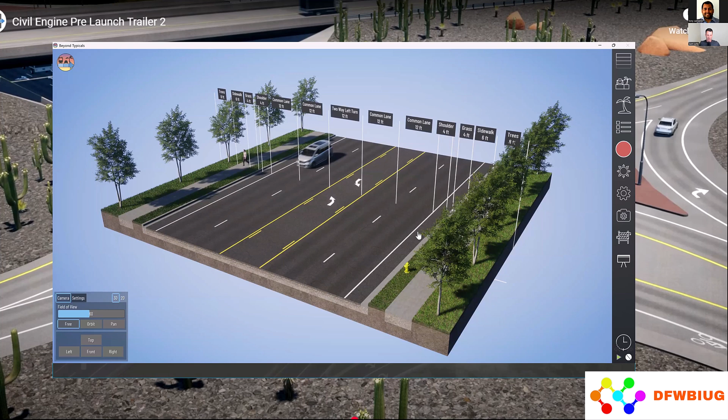So in 2022, about 3 years ago, we launched Beyond Typicals, a 3D typical section creator, which I'll demo. That's been going very well - it's become kind of an industry standard for typical section generation, and it's also been pushed beyond what we thought it could originally be used for. Then last year we started work on Civil Engine, which is a more robust visualization engine for transportation, and I'll get into that more in depth.

So I do want to show Beyond Typicals briefly. This is used by more than 150 organizations, and maybe some of you on this call are familiar with it. If you are interested, I encourage you to reach out to our Contact Us page - Brian Stropes is on this call, he's our point of contact on Beyond Typicals, so you'll probably be working with him. Essentially, this is an interactive drag and drop 3D typical section creator.

I'm going to bounce through a couple of example projects we have preloaded in the software. You can see here this is adjacent in an urban scenario to these buildings, and we have phasing, so we can go existing, trenching, lane closure, final - quick communication, and it's pretty easy to put these things together.

Our goal with all of our software at BeyondCAD is to democratize visualization so that engineers can do the visualization themselves - empowering those designing the projects to also visualize and communicate them. We want these to be intuitive tools where you don't need a background in visualization, you don't need to know 3D modeling, you don't need to know Blender and Photoshop - you can just learn our software and make the visuals straight out of there.

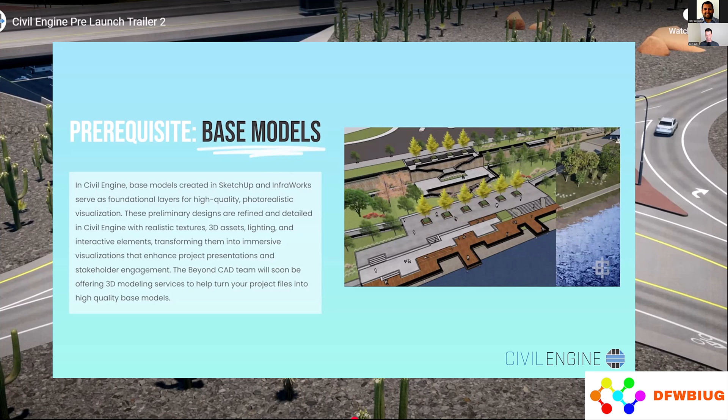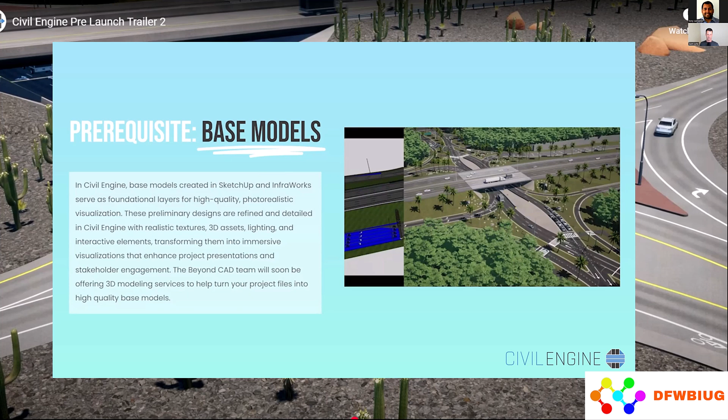Civil Engine supports FBX and OBJ imports. So theoretically, if you can export those file formats, you might be able to bring them into Civil Engine, but it's not always the best results. To be honest, this is the hardest part of all of it, getting your data from design into visualization. We're doing our best to make that a seamless transition.

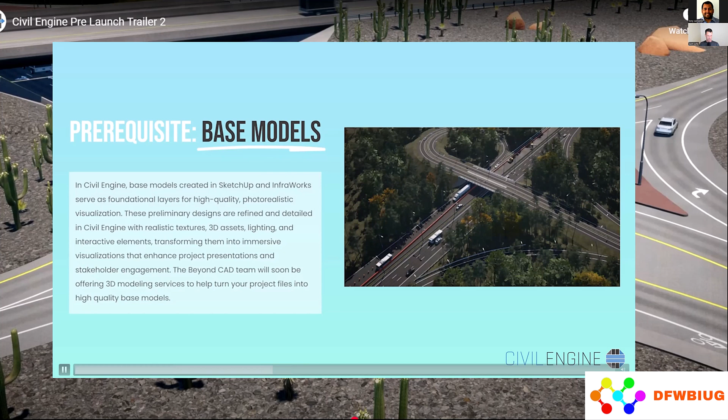That's why we're trying to focus on a few workflows and then expand out from there. I'll demo how this process works in just a minute.

Core to Civil Engine is the ability to put traffic in there. You do this by placing one traffic path at a time, and then you can link those traffic paths together using intersection controllers and merge-diverge linking. We're going to leave this in beta even after our public launch because we're still testing and refining. The traffic placement and intersection controllers are very robust, but the merge-diverge linking is still a work in progress.

One of the cool things about our advanced traffic is that the traffic library can be completely customizable, and you can do that per lane. So imagine a scenario where maybe you have an HOV lane and you want to make sure you never have trucks show up in there - that's possible. Or maybe you have a bus lane and you want only buses to show up in there - that's possible. Or you can do that globally.

So maybe there's one specific car that you don't want to show up at all - you can have that control. Or maybe you want our low poly vehicles, which are just kind of white blocky shapes, to all show up for aesthetic or performance reasons - you can do that as well. So all of that stuff is possible within the traffic system within Civil Engine.

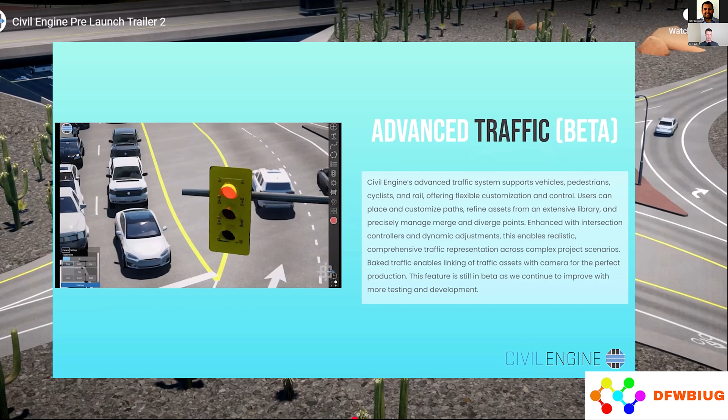The goal of our traffic system isn't to simulate or be a replacement of Vissim. It's just to give a good representation of traffic to communicate your project. That's our goal - we want to democratize the communication of projects in 3D for our customers. This is not design software, it's not intended to be design software, and it doesn't even integrate with Vissim. That's why we're really trying to make these things work really well within the product itself.

We have one of our core features, the path system. For those that have used Beyond Typicals, this actually functions very similarly - in Beyond Typicals, if you put an asset, you want to have that asset attached to a certain section, and then from there offset left to right, up or down, spacing, all those things attached to the path. This is the same thing, but you're placing the path using these points, and from there you can control the spacing, the offset, the scaling, and so on.

To be honest, when we did this, we were thinking, oh, this would be cool to put trees down a median or something like that. But the more we pushed this feature and functionality, the more we realized how many different use cases this could be used for - or traffic. And then I was like, oh wow, we could do this for barrier rail and guardrail to make it flexible in placement, which hasn't really been possible before. And then pavement markings is another scenario, both things like arrows, but also linear pavement markings as well.

Similar to the path system is the area system. You can imagine enclosing an area, and then it's the same paradigm where you're putting assets within that area and controlling the spacing. For both paths and areas, you can do multiple assets, up to 5 asset slots. So if you want 3 different types of trees in the same area, you can do that. With areas, you can do things like tree placement, 3D grass placement, and even area highlights, which is part of our visual graphics emphasis within Civil Engine.

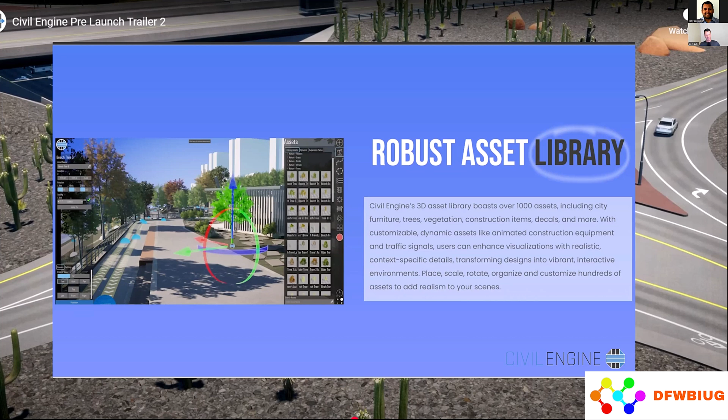We have around 1,000 assets, including static and dynamic assets. Static assets are things like trees or chairs or buildings. They're not really customizable, though trees may blow in the breeze. Then we have dynamic assets where you can customize them, like construction equipment where you can choose which animation shows up.

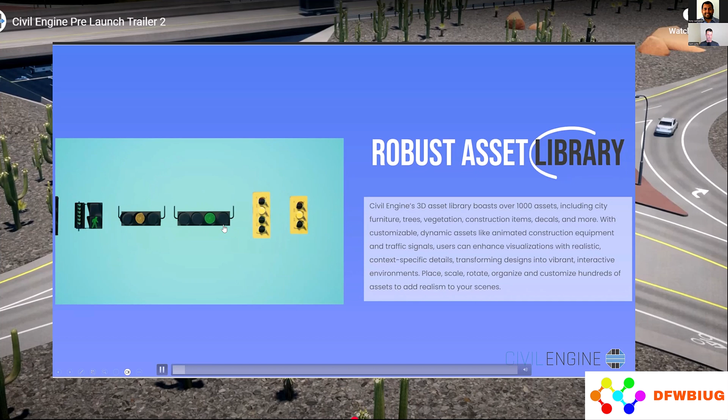Or maybe a construction sign where you can type in the message on that dynamic message sign, DMS, for placement. We also have some dynamic traffic signals, and those can be linked, some of them to our intersection controllers. That's kind of a beta feature we're pushing right now, and it will only improve from here on out.

We have a library of materials, our texturing system, and we've really tried to make these as realistic as possible. For these transportation and civil projects, we are not interested in architectural projects at all. We've had several people reach out and say, wow, this is really cool, I'm doing this building or architectural adjacent project. And I'm like, there are other tools for that - go use Lumion, go use Twinmotion. We're building this specifically for transportation and civil.

That's even to the point where when you place traffic paths, there's kind of a wear path, which is something you'll see if you look at roads a lot, like I do - that's my hobby, staring at highways and roads. Those are the subtle things we do to make it where you can take that base model and make it photorealistic without needing a background in visualization yourself.

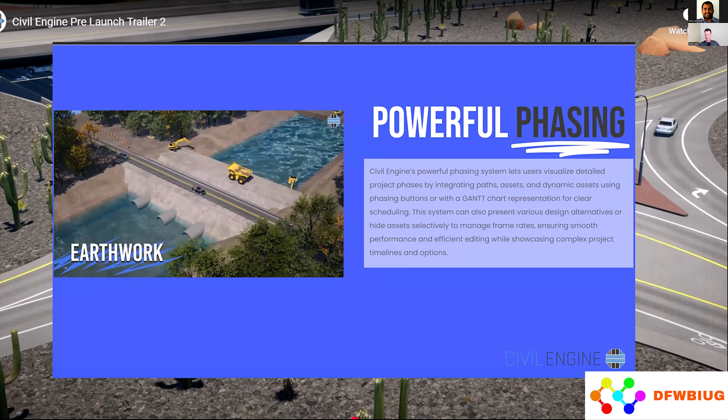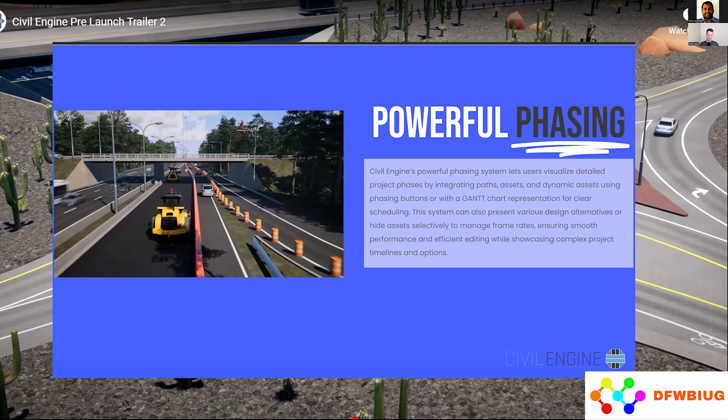Also built into Civil Engine is phasing. You saw that a little bit in Beyond Typicals, but Civil Engine is more robust. Everything you place in the scene ends up in the hierarchy - assets, dynamic assets, imported assets, paths, areas, base models, all of those show up in the hierarchy. From there, you can organize them into folders, or tag them with various phases or alternatives. This makes it very powerful to turn things on and off depending on what you're trying to show and communicate as part of your project outreach.

The goal is to build a realistic 3D model of your project. Once you do that, we want you to make image and video renders, and I'll show several different ways that you can do that.

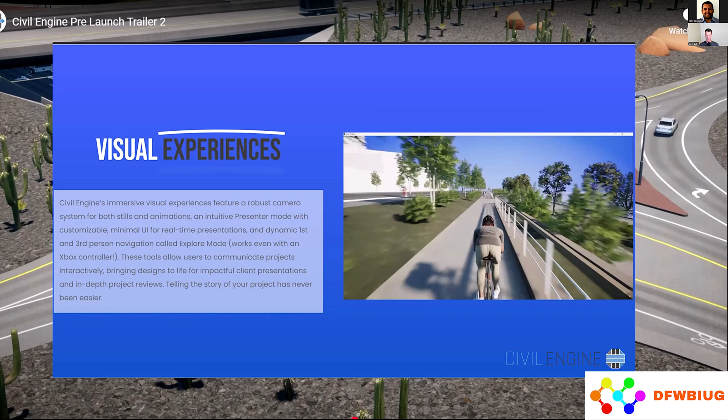But also, why not jump in? Why not walk around your project? This is video game technology, let's leverage that. So we call this explore mode. Currently you're able to walk around as a first and third person, and ride a bike in cycling mode. In the future, we hope to have other modes like driving, helicopter, motorcycle. We really want to give a lot of options to users to show off their project.

I showed off photo compositing a little bit in Beyond Typicals. We've ported over that same functionality in Civil Engine, so now we can blend these 3D models with images in the model with something more than just typical sections - now you can do roundabouts, diverging diamonds, intersections, and so on. Again, this is not an automated process, you have to manually match the camera. That's something we hope to improve in the future. But once you get that matched, you can save that camera and return to it in the future.

Visual graphics is a big part of Civil Engine because you want to have all the tools at your disposal to communicate your project. In the past, with Civil FX, our company and shops like us, you might make a render and then go into post-processing and add labels or arrows or area highlights.

In Civil Engine, you can do that stuff in your 3D model so that when it renders out, that stuff's already there. You don't have to go anywhere else. That's one of the big goals of this—we want to give you the control to do all this in Civil Engine so you don't need post-processing, and you don't have to know how to use Photoshop, After Effects, or Final Cut Pro. You can do it all within Civil Engine, to the point that we even have Sequencer, which is basically video editing within Civil Engine.

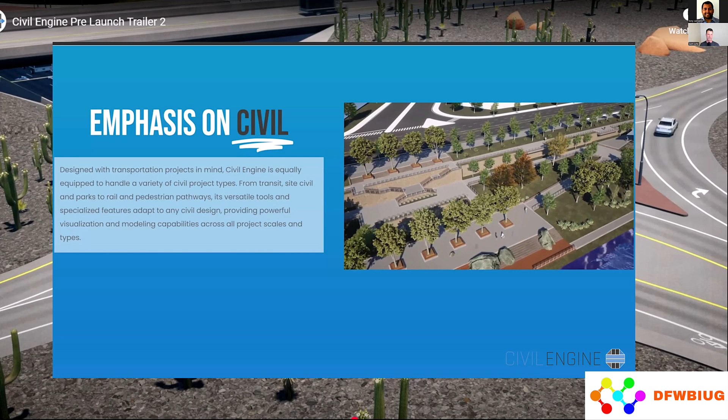That's our primary focus. Our team is very small, but we've been working passionately towards this. This is like a passion project for me—probably the pinnacle of my career. It's something I'm more proud of than anything else I've done, this product, Civil Engine.

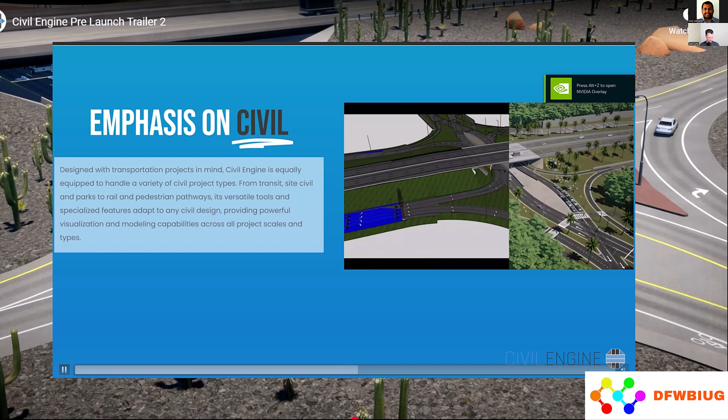We have some presets which make this really convenient, but you can also import your own cross-section of a barrier rail. Maybe you have a single slope face that's not in our library—you can import your own section and build that out yourself.

All right, I'm going to jump out to a demo now. I want to give time for questions too—I'll talk about licensing toward the end, so let me leave that all together for now. Let me just open up the chat.

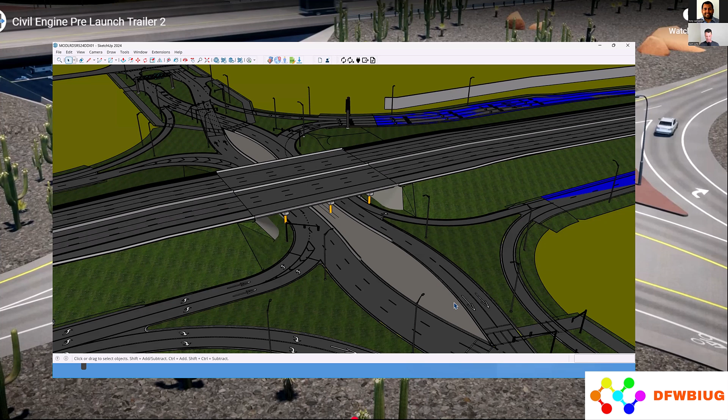So you do need to have a good base model, or you're not going to get very far in Civil Engine. Once you get there, you can import it into Civil Engine, and it does not magically come in like this, but with some time, this is the goal, to take it from this to this, and this is the same base model that I just showed you in SketchUp.

You have this diverging diamond, and now you can see what happens when you apply these photorealistic textures. Some of the striping was from the base model, and some we've supplemented here in Civil Engine. Then adding the traffic paths, the trees, all of these together, you now have a realistic representation of your project that we can use to make image and video renders, or we can do explore mode, interactive stuff, things like that.

So I'll show you around the interface a little bit. Down here in the bottom right, we have these visualizers, and this shows a representation of all the paths that I've already placed. You can see all the traffic paths are in blue, the yellow ones are the pedestrian paths. You can also place assets using the path system.

So you can see here, these trees have been placed using that path system. If you use the path system, you're going to have a lot more control. So like these trees, for example, I can go through and change the spacing. Right now they're 50 feet. I could change those to 25 feet, or whatever, 20 feet. Then you can change the offset either internally or externally. You can also do some randomization if you want to. So that's how the path system works.

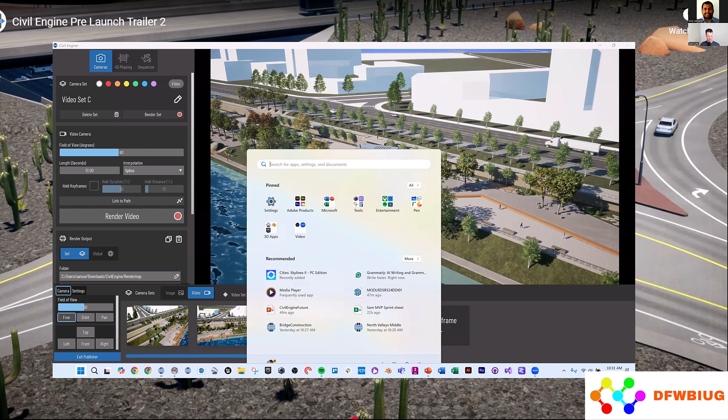And let me close Beyond Typicals as well. That's really nice for some more dynamic views. Let me show a few other goodies in here.

So this is another example project. Actually, I'm going to load this, I have a saved version, it's better, of this. And you can save everything, every file. It's a proprietary file format called .ce for Civil Engine. So if you have multiple Civil Engine users, you can pass the files around. It builds everything into a single file.

And so when you have something like this, a construction phasing scenario, you can see here we have this Gantt chart 4D phasing, and you have to set this up yourself. It doesn't automatically, like you can't link with Microsoft Project or anything like that, but I can move around and show how this project would be phased. This was an earth and embankment road with pipes, and then through phasing we have our detour, and then we get to the bridge here at the end.

This is a very simple example, but hopefully gives a good idea of how this tool can communicate dynamic projects that we all face. And then here in the sequencer, again, the publisher is this special thing I'm looking at now. We have cameras, we have 4D phasing, and then the sequencer is essentially video editing, but it's a little different because these aren't pre-rendered video clips. These are cameras that I'm linking together. You can see here I have Video Set C, which is one of my cameras.

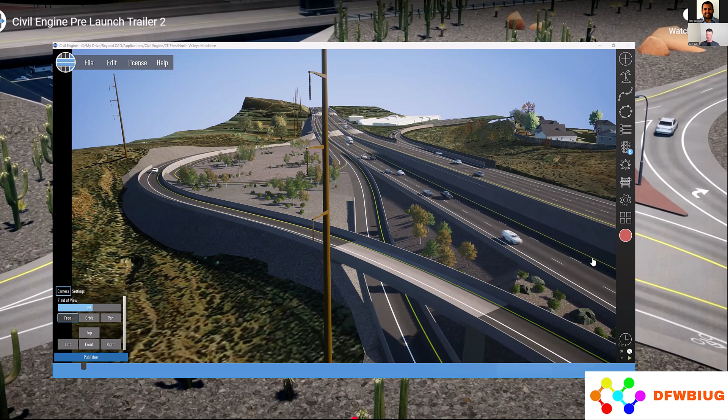Can you create a recorded video simulation? What video quality can you create? Yeah, you can render out whatever resolution you want. We have presets - 1080p, 4K, 8K - or if you want to do something for TikTok or something, you could make whatever resolution you want, and it will render that video file out that way.

Primarily we have MP4 or we have AVI, but I recommend MP4 for those.

From your experience, which application runs better or smoother, the desktop or the cloud? Well, it depends on how good your graphics card is. This is running on a 4090 mobile, like laptop graphics card, but I'm running in 4K, which slows things down. So it's just going to be dependent on a lot of factors.

With the cloud, you have to deal with the internet connection, so there are some more bottlenecks involved there, but we do have a number of users that pay for that - it's an add-on, like 25% more for the cloud, and that's just an option. Some people use both based on convenience.

I had a question about 360-degree videos. We don't have that yet, but that's on our roadmap. We will add it definitely.

I don't know if we'll get that in by public launch, but a little behind the curtain - what we want is, up here there's cameras, 4D phasing, and sequencer, but we want a 4th one called presenter mode. That's kind of like a streamlined interface that you can customize, and then you can choose which cameras show up, which phases show up, and that's going to be really good for interactive presentations or public meetings or touchscreens. We don't have that yet, I don't know if we'll have it in time for public launch, but that will be available this year.

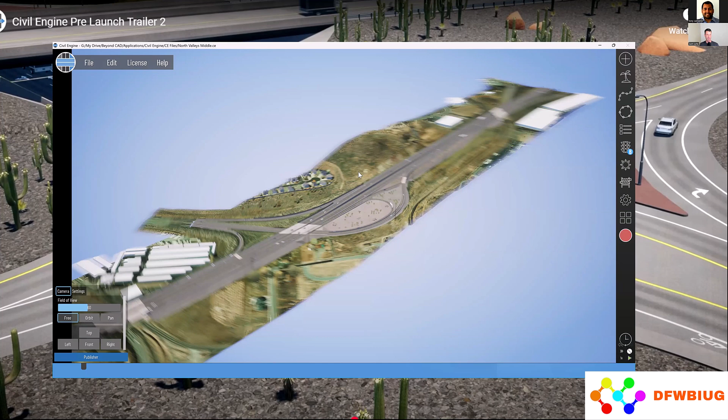Getting the base model into Civil Engine is the biggest hurdle. If you can get in there, there's so many fun things you can do. We do understand that is hard, and we're trying to do our best to streamline the process, both in the software and in our training information. But there's no hard limit, it's just based on how many polygons are in there.

What's your aerial texture size? What's your hardware? What's your RAM? These are all the parameters that determine what size of project you can open up in Civil Engine. One example is Unreal Engine has a texture limit, so anything bigger than 8K textures, which is like 8,192 pixels, I just don't think it's going to work. So this one, I had to downsample this aerial because it was like 20,000 pixels on one side.

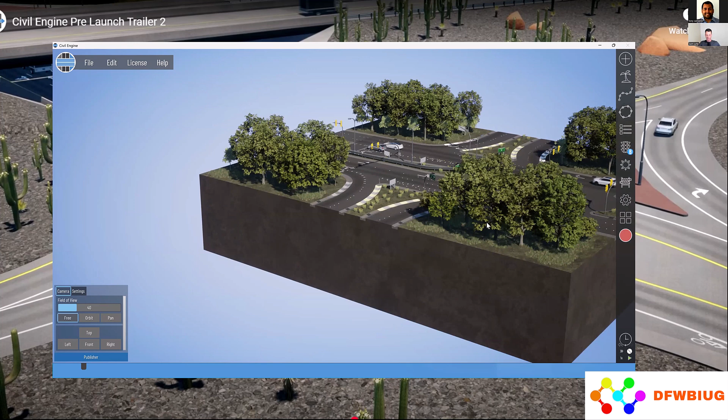And you could do that for an intersection. If you go back to our environment settings, you have those same controls that you had in Beyond Typicals. Let's say we wanted to make this bright and fun, or match branding for a project or anything like that. So yeah, you have that control. You can also turn the clouds on and off if you want them. But yeah, that's something that we have as part of this.

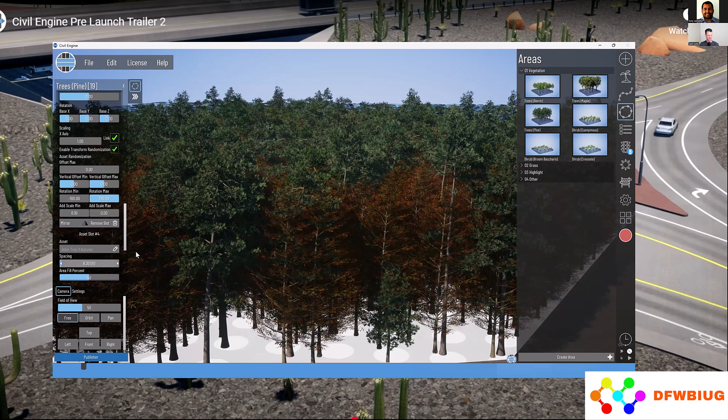This is probably a terrible example, but it'll give you an idea of how you can blend this stuff together. That's a lot of trees. Let's do 50 feet spacing. There we go. Without having to place a ton of different areas in the same place.

Very cool. Yeah, so the areas are fun to play around with, and I recommend this example project, the slabs, to do that for 3D grass.

You can see here, this is kind of a use-at-your-own-risk, don't try this at home thing. If you made a big area of 3D grass, it might melt your GPU. That's something we're working on, some more optimization. This is optimized, like all our assets either use nanite or LOD, level of detail. That said, there are a lot of polygons here, and you just have to be careful placing that. We do hope to put some more UI warnings and training around that kind of information.

And then our highlights—these are really cool for construction, but maybe you want to use them kind of like how you use hatching in Civil 3D. So we've got a bunch of different textures in here, and you can customize all of those.

So the speed is really slow, let's speed that up. Yeah, you can control the opacity, the color, the type of texture. We've got lines, we've got crosshatch, we've got dots. There are a bunch of different things you could do if you wanted to call out different parts of your project.